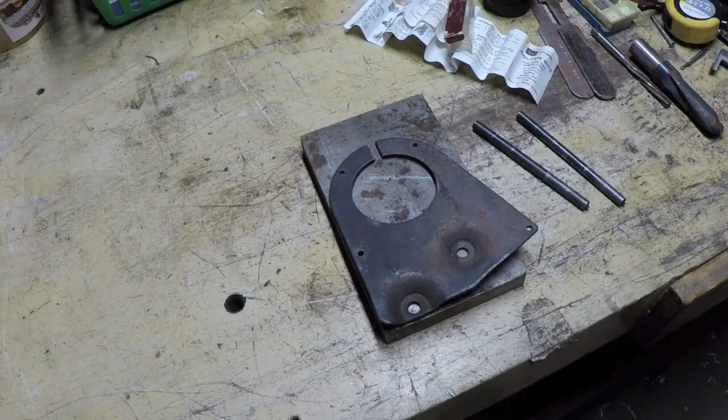Well everybody, I decided that I'm going to make the missing bracket so I can put this Craftsman sander together and sell it. I ended up doing the trade for the grinder for one of my compressors and a small sander I had, but now I still have this sander sitting here in my way, and I just know that, well, as you guys probably already realize, I have trouble finishing projects.

One of my viewers just mentioned, I guess in one of the flea market finds videos recently, I was talking about all that metal I got for when I want to make projects. And he made a comment that I talk a lot about making projects, but he doesn't see the projects. So, all right Larry, here we go.

This is a piece of metal I just cut from that haul. We're going to make that cast bracket out of solid steel, so it's actually going to be, I think, an improvement over what was there.

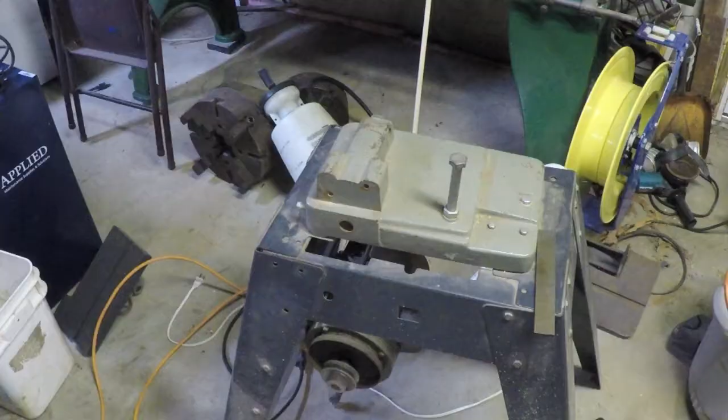So my first problem is I've got to locate the two holes that actually mount the bracket to the base. What actually holds the bracket onto the base here are two bolts that go through that metal piece I was just showing you on the bench, that sheet metal piece, and then they pass through the bracket and thread into these two holes right here.

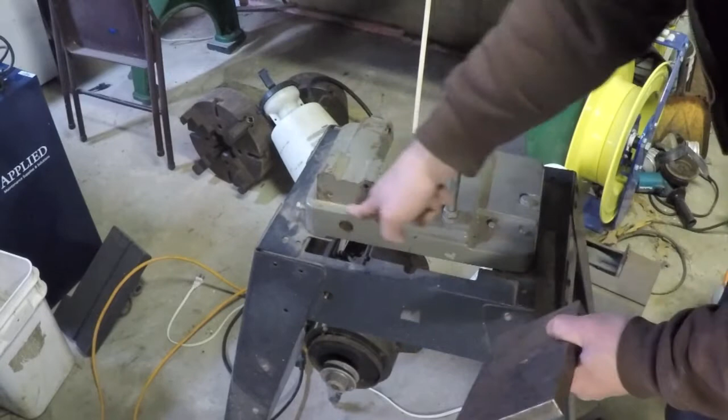So I want this to sit on this shelf right here, and then I want the holes to be here. Now, how do I locate those holes? Well, they're offset - you can see this one's higher than this one.

So the easy way to do it, if I had them, would be to use these things. I don't know if these are called transfer buttons, or for lack of a better term, but they're little threaded inserts that have a sharp point on them. What you do is find the one that's for the corresponding hole. I actually have a pair of these large ones - these are the only ones I have, and these were just miscellaneous that I found in something.

So what you do is find the proper pair, thread them into the holes, hold your piece over them, give it a whack with a hammer, and it makes a little indentation - two little center points right where you want to drill your holes.

So as I just explained, I don't have two of these of the right size. These come in a kit normally with a whole bunch of different sizes and multiples of the same size in case you have multiple holes you're trying to transfer. So I was thinking I could use this plate as a template or guide, so to speak, and then use transfer punches. Now I've got a transfer punch here - basically this is going to fit right in this hole.

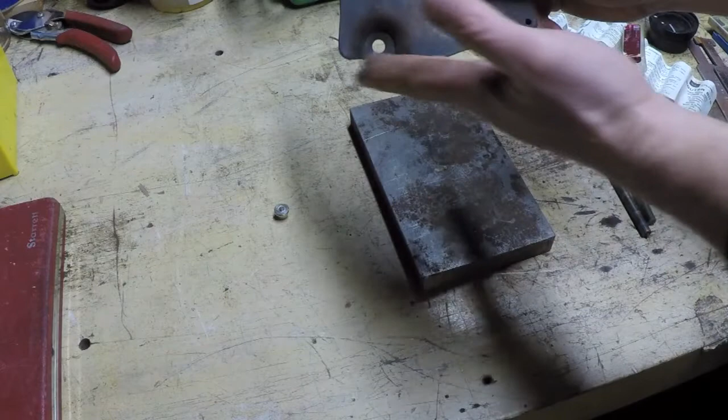But my problem is, as you can see, this has got an angle on it right here. This line on the bottom here is the line that would normally be parallel with that shelf this is going to sit on. Now you notice I said parallel and not sitting on it. The reason why is I can't just line this line up with this edge here like I wanted to do and go, okay, that's a good spot, clamp it here, bang bang, and I'm done. Nope, not going to work. Why? Well, I'll show you why.

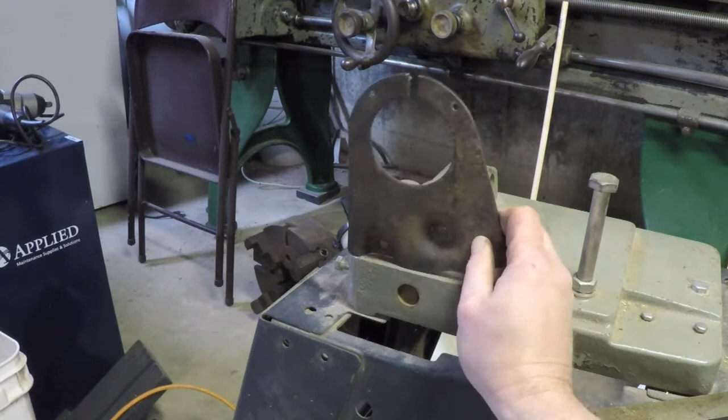So the problem is, when I put this on here, if I just sit it on here like that, the holes don't line up. This is actually too low.

When this is bolted in position, it actually sits up here like this. There's a space there, and I don't want a space between the bottom of my bracket and this shelf. I want that bracket to sit on this shelf, because the only thing that holds this bracket to the base are these two little bolts. So I think a lot of the strength of this whole assembly is derived by the fact that it kind of sits on this shelf.

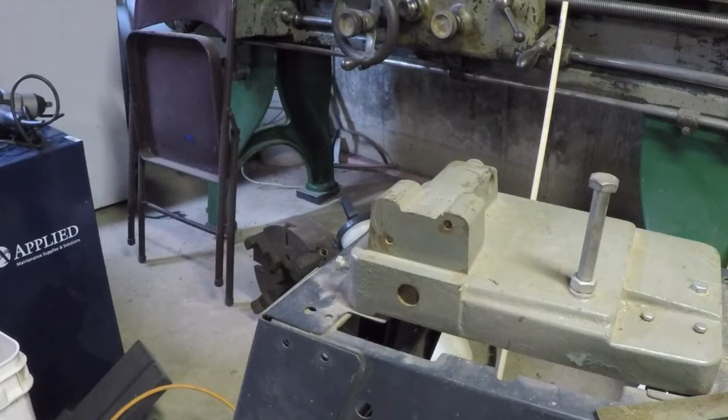My thought was, well, no problem, I can find out what the size of that gap is right there. Could even use gauge blocks if I wanted to get really technical, but the reality is if I just take this parallel and stick it on here like that, and look at it, at first glance I thought, oh, perfect. But then I realized that for some reason right now that one's lined up, this one's a little low. This needs to be tilted just up a little bit, not much at all, just a very little bit.

So what that told me was that unfortunately the gap between the bottom of this plate and this area right here is not parallel. In other words, this line right here on the bottom of this and this line right here are not going to be parallel. Does that make sense?

But it's such a slight amount that I think what I'm going to do is still use this spacing right here. And then my through holes in the bracket, I'm going to leave them just a tiny bit larger so that hopefully I'll be able to get this to actually sit down flat on this thing. It's not the ideal scenario.

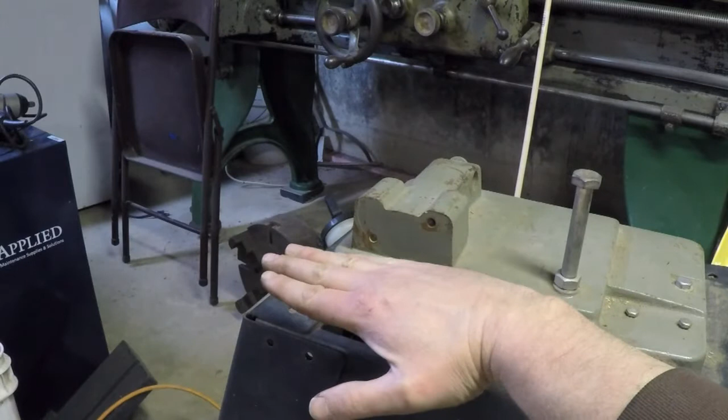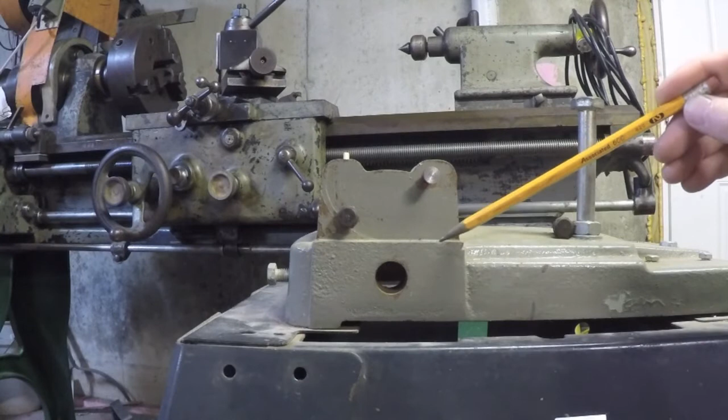I don't know. So I thought about it, and if I really want to get precise positioning of these holes in respect to this area, what I could do is take this whole base and put it on my cast iron surface plate, then use a height gauge and put a precision pin in one of the bolt holes like this, and get the height off the top of the pin to the plate, subtract half of the diameter of the pin, and that would give me the center line height of this bolt hole above this area. Then I could measure from this plane to the surface plate to get the dimension from here to here, subtract that out, and that would give me the dimension from here to the center line. Then, since I could arbitrarily pick any spot from the edge of my new bracket to start, that's the hypotenuse of a right triangle here, if you see it.

But what is apparent to me is that I think I'm just overthinking this whole thing. I'd be willing to bet that if I had the original bracket in front of me and looked at the holes, they're not precision holes, that they're actually a little larger than the diameter of the screws and would allow for a little bit of fudge factor. So I think what I'm going to do is just ham and egg this thing, I guess.

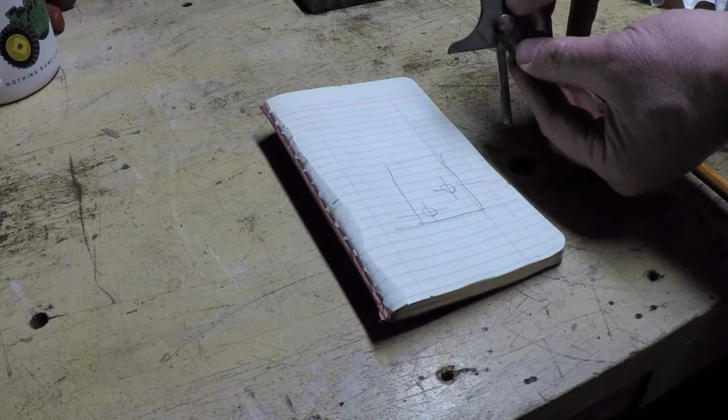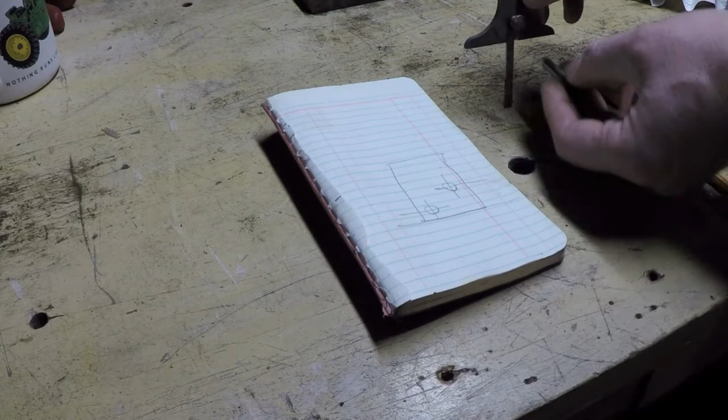All right, so here's what I did. I took my pin, one that fits in that hole really well, and stuck it in there, and I took this little depth gauge and basically held this on the top surface of the pin, and brought the blade down so it's just touching that top surface that I want the bottom of my bracket to rest on. I tried to keep this line right here as parallel to that surface as possible, because obviously if I tilt it over there's going to be some error, but I'm hoping that just by eyeballing it, the amount of error would be negligible in my final calculation.

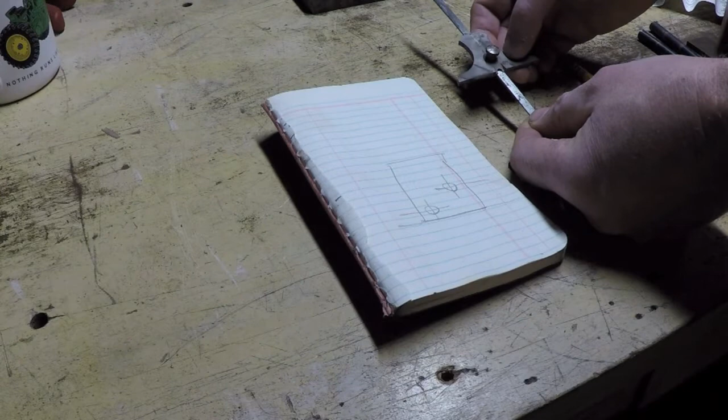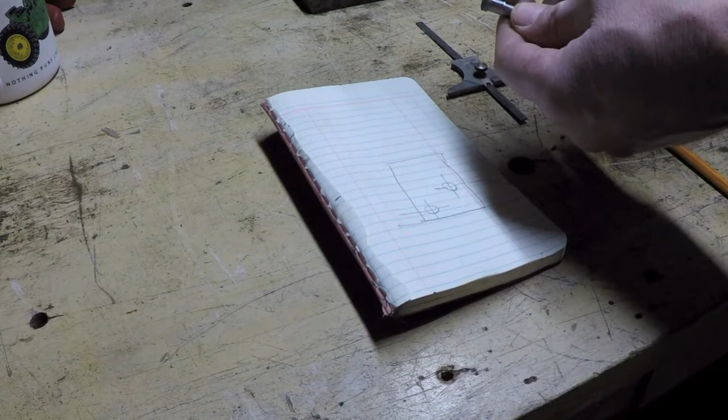So I took this measurement right here. I don't know what this is yet. Then I took my pin, came out and measured it, and my pin, not the dimension that goes in the hole, but the dimension that I actually used as the surface for the depth gauge, is actually 312 thousandths. So 312 thousandths, half of that is going to be 156. Let me just write that down before I forget: 0.156. Okay, so now if I subtract 0.156 out of whatever this dimension is, that should give me the dimension from the center line of this hole to that point, to that base.

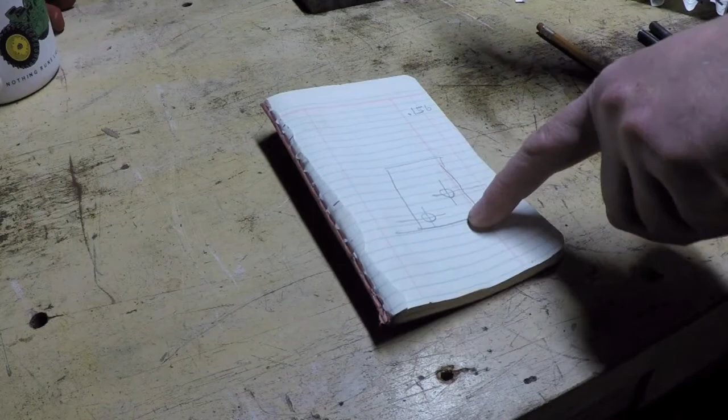Go just a little past it. Oh, you know what? See, I'm not bearing on the right surface there. That must be one of the things that makes these right-hand calipers.

I'm a lefty, for those of you who didn't know. Some of you right now are going, "Oh, he's left-handed. That explains a lot." All right.

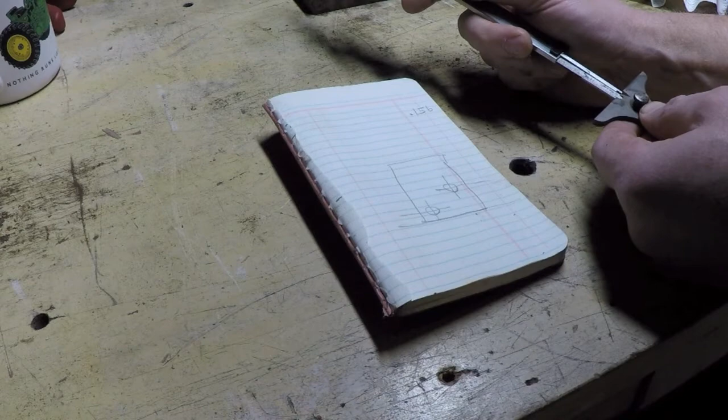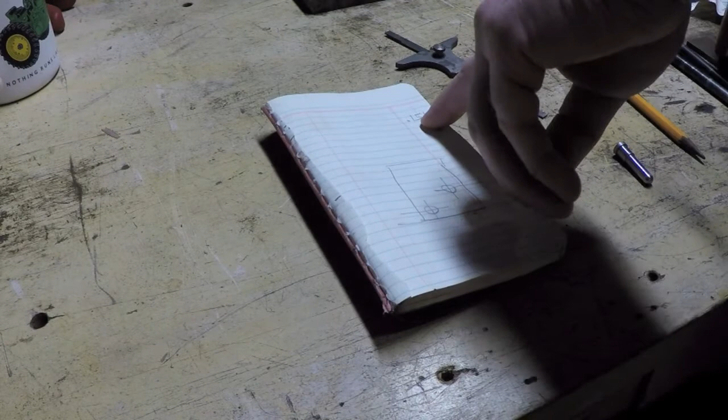Wow, that's almost dead on. Oddly enough. 700 thousandths. Matter of fact, if I take that thousandth away and I subtract 155 from that point right there, because I just took the thousandth away, so now I got my first dimension. I wrote it down here. Now I could reset my caliper and then find the other ones, but as long as I get the calipers set, I'm just going to use the calipers to describe the line.

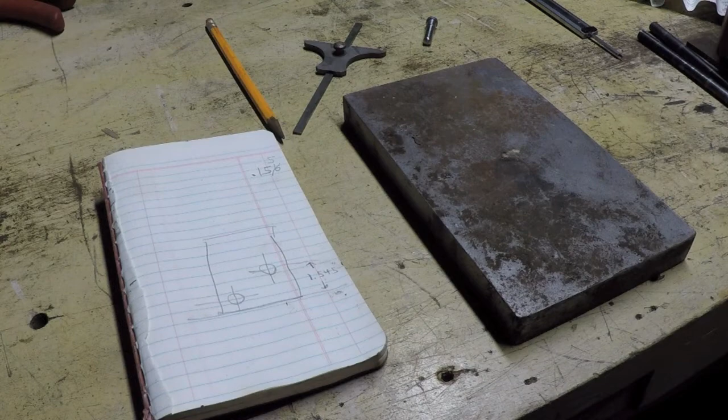So first thing I'm going to do is make sure that this is square. Now if I wanted it dead on square, then I really should stick it in the mill, face one edge, set it up in the vise properly, and face the second edge so I have two reference edges to go off of. But in actuality, this is square enough for my purposes for this project. I could clean this up. I'm going to leave this dirt on here because it's the poor man's Dykem blue.

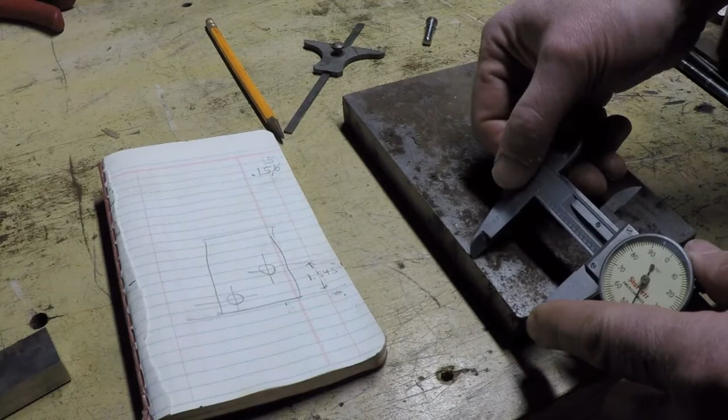The next dimension I want to find is from this edge to the center line of this hole right here. And I had said that was going to be an arbitrary dimension. I just wanted to make sure I had enough meat here when I drill the hole. But in reality, I forgot that the original bracket was narrower here, and then it gets larger over here. So unless I have a clearance issue later, I'm not going to bother taking out this meat right here.

So I want to know that this large diameter right here, the center of which is the center line of the shaft, is more or less centered left to right on this whole width right here. Because I can always later on, if I have to, mill off something on one of the edges if I want to move the bracket, or remove any material that might be impinging on something I haven't realized yet.

Okay, so what I noticed is that when I put this line right here parallel to the bottom, this slot that they have right here is pretty much perpendicular to that horizontal. Okay, so I can eyeball where that's going to be. So what I can do is just take the width of this whole piece, divide it in two, and give myself a line here.

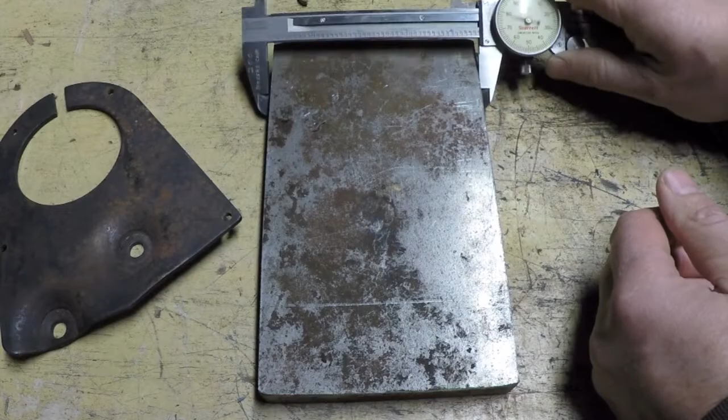Anyways, I had located one of these holes in one axis, and then I decided before I locate the other hole that I wanted to locate this hole here for the spindle. Since this slot here is on the center line of this circle, I'm going to put that slot right on the halfway point. I don't remember if I measured this, but I'm basically going to take the overall dimension of this, roughly. Make a quick mark there, and yeah, that's where I want to be.

So I'm going to make a little line there, and I'm just going to scribe. Oops. Part of my problem is the tripod is right in my way.

So now to locate this hole, I'm going to basically eyeball this. I'm going to hold this plate so that the line I scribed is in the middle of that slot, and at the same time have the line I scribed over here in the midpoint of that hole. And once I get that right where I want it, I'm going to stick the transfer punch in there and smack it.